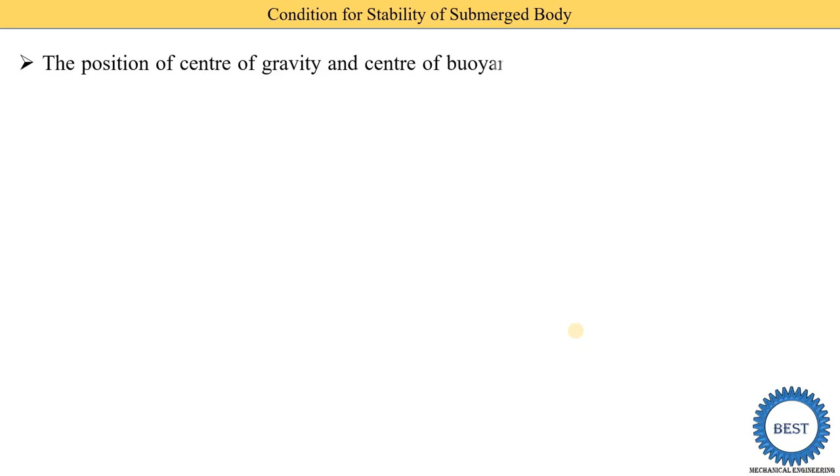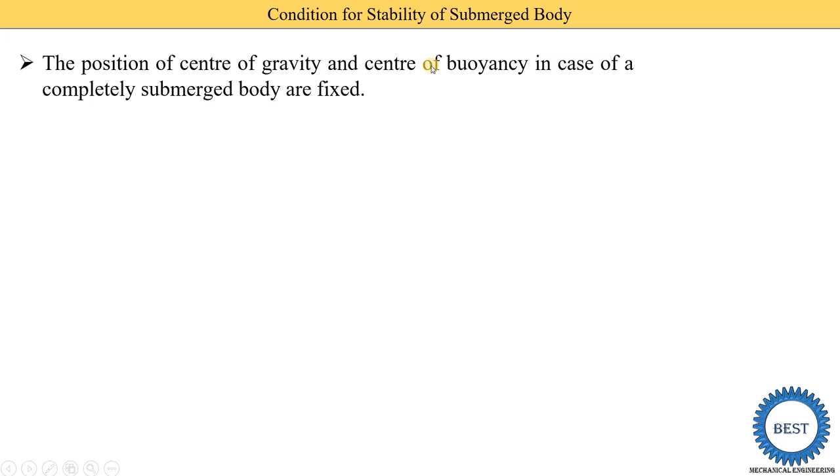For understanding these 3 points, we need to focus on two important points. One is the center of gravity and second is the center of buoyancy. When we study buoyancy, there are three important points. In the last theory of the metacentric height and the metacenter point, we studied 3 points. One is the G point, that is the center of gravity. Second, we studied the B point, the point at which the buoyancy force is applied, and third is the metacenter point. Metacenter means it is a point about which the body is oscillating. So when we study the submerged body, we need to focus on 2 points, center of gravity and center of buoyancy. We do not need to consider the metacentric point.

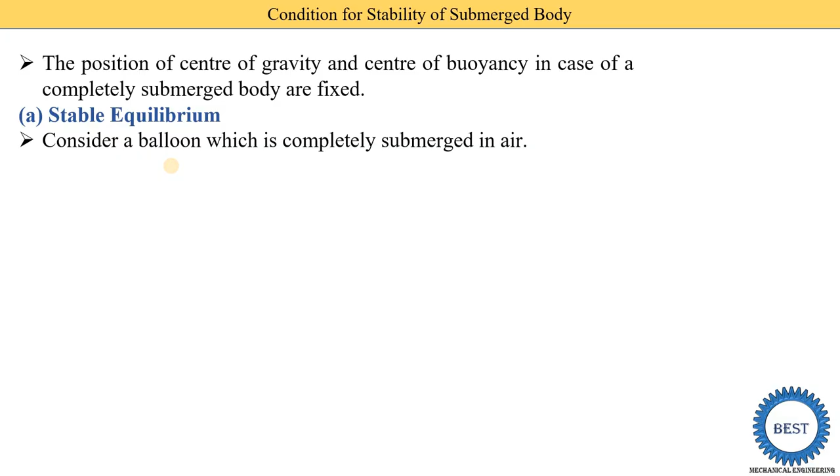So first we understand stable equilibrium. For understanding stable equilibrium, we consider a balloon which is completely submerged in air. Submerged means it is submerged in air, or submerged in a liquid or water. So here we see this balloon, and at the end of the balloon, for increasing weight or making it stable, we add some additional weights. In the balloon, this is the G point. G means center of gravity, the point where the whole weight of the balloon is concentrated. We know the weight always acts in the downward direction, so here we draw the downward arrow, and this W indicates the weight of the balloon.

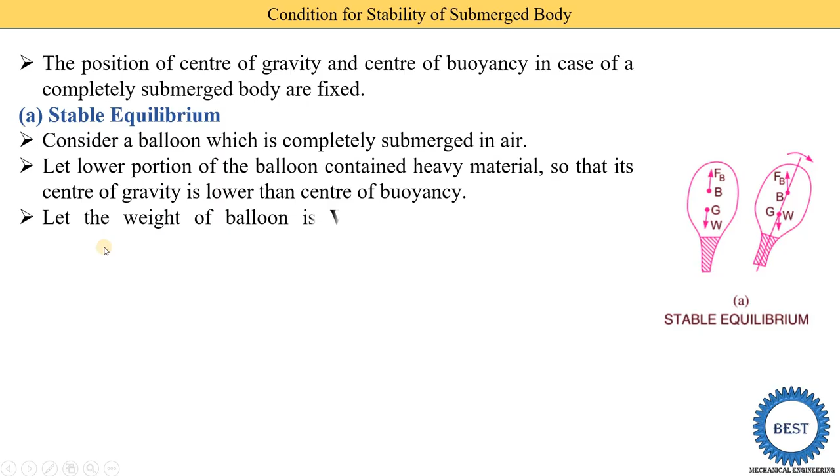And this is the B point, the point at which the buoyant force is concentrated, and it acts in the upward direction. The lower portion of the balloon contains heavy material, so its center of gravity is lower than the center of buoyancy. Due to that, the G point is below the point B. Let the weight of the balloon be W, acting through G vertically downward, while the buoyant force FB acts vertically up through point B. For the equilibrium condition, both the forces, the weight and the buoyant force FB, must be equal. So here W and FB are the same.

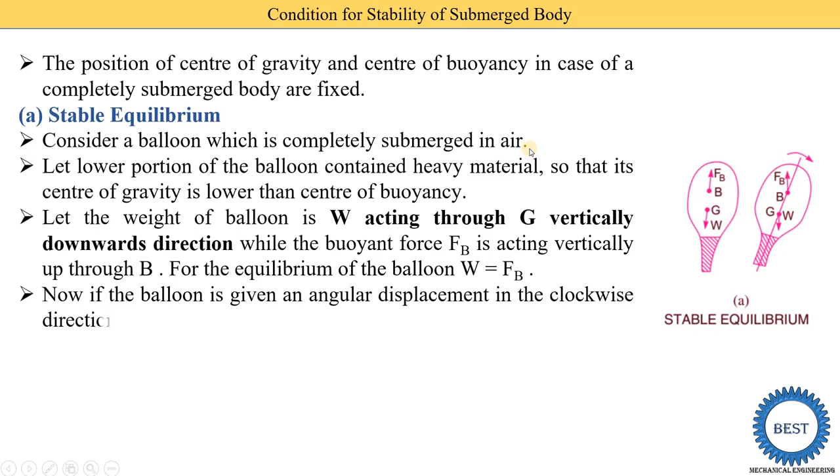Now the balloon is given an angular displacement in a clockwise direction, as shown in figure A. In this figure we see that a small angular displacement is given to the balloon in the clockwise direction. So at that time, what happens?

Then W and FB constitute a couple acting in the anti-clockwise direction and bringing the balloon to its original position. Thus the balloon in this position is in stable equilibrium. That means when we apply a small angular displacement in the clockwise direction, the balloon reaches a new position.

Here we see it is at a certain angle, and in this diagram both are acting on one axis, but here the axis is changed. So suppose we draw one vertical line, then a cross line, and then again this vertical line. So when we apply a certain force in this downward direction, what happens? The balloon is moving down in a clockwise direction.

But here some couple is created. So which couple is created? From here we see that W is acting in the downward direction. From this point to this point, FB is trying to move in the upward direction. So here one couple is acting, and this couple is trying to move in an anti-clockwise direction. So the balloon comes back to its original position, and it is called stable equilibrium.

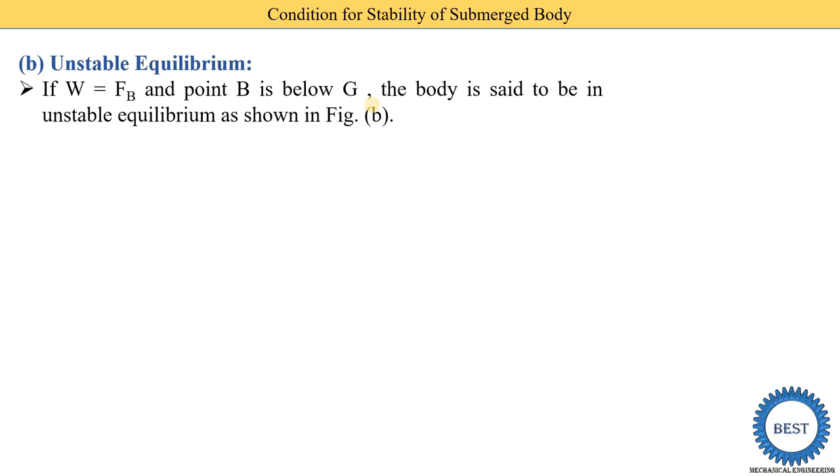If W and FB are equal, so W is equal to FB, here point B is below G. Earlier, B was above the G point. So in some cases it is possible that the centre of buoyancy is below the centre of gravity. Such a body, in which B is below G, is an unstable body. So the body is said to be in unstable equilibrium as shown in this figure.

So here we see this is the balloon, here certain weights are there, this is the G point and this is the buoyancy force. So in the diagram we see B is below the G point. W, the weight, is acting in the downward direction, and the buoyancy force FB is acting in the upward direction. So if a slight angular displacement is given to the balloon in a clockwise direction,

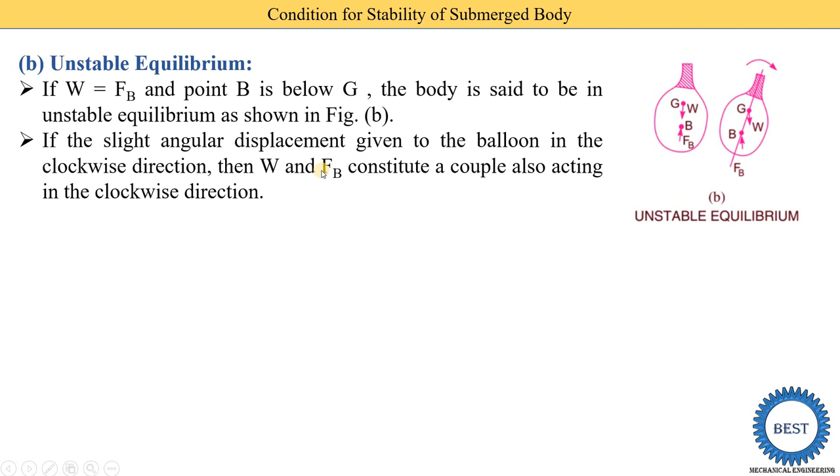we apply some angular displacement in the clockwise direction, then W and FB constitute a couple also acting in a clockwise direction. So how can we say it is also acting in the clockwise direction? Here we see this is upward, then this line, and from this line W is going in the downward direction.

So here the couple is created also in a clockwise direction. So here we give the angular momentum or angular displacement in the clockwise direction. The couple is also created in the clockwise direction. The body does not come back to its original position.

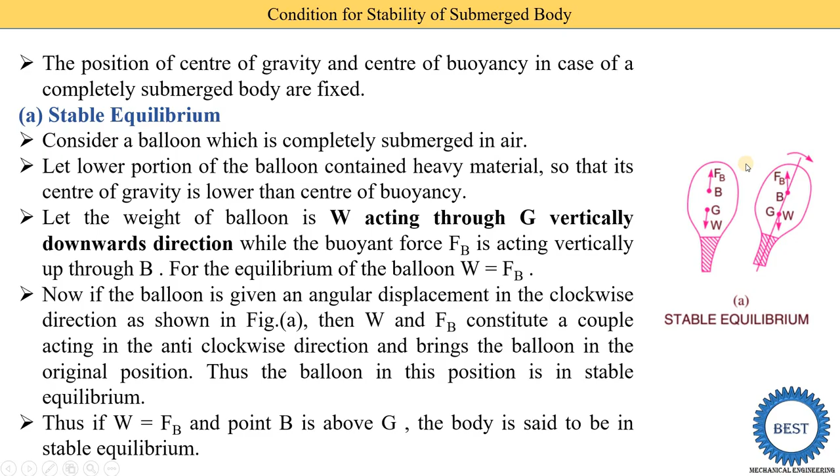Now earlier, in the stable body, we saw that the couple is acting in the anti-clockwise direction. So the couple is acting from here, these cross lines and this FB, so it comes in the anti-clockwise direction. But in the case of the unstable body, the couple is also acting in a clockwise direction, because here W is in the downward direction. Thus the balloon does not return to its original position and it is in an unstable equilibrium.

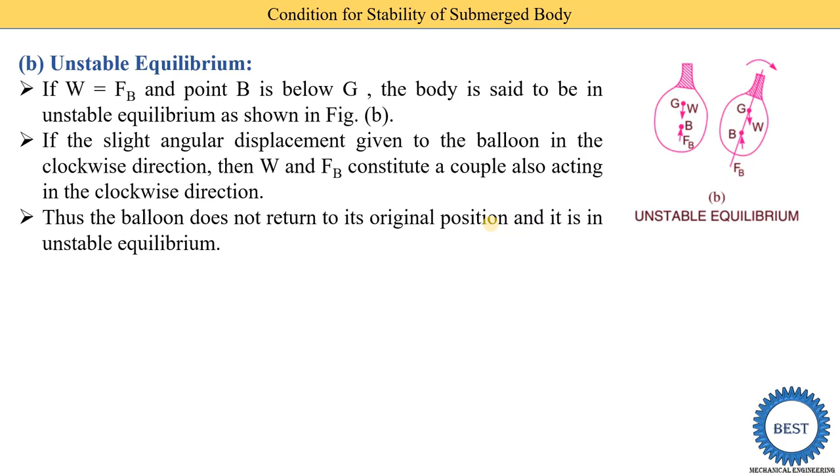Unstable equilibrium means when we give some angular displacement to the body and the body does not come to its original position, then it is called unstable equilibrium. And the third is neutral equilibrium. In the case of neutral equilibrium, first the weight and the buoyant force FB are equal. B and G are at the same point.

So in the earlier two cases, what we studied: in stable equilibrium, the buoyancy point B is above G. In unstable equilibrium, the buoyancy point B is below G. And in neutral equilibrium, B and G are at the same point. Okay, so B and G are at the same point as shown in the figure, then the body is said to be in neutral equilibrium.

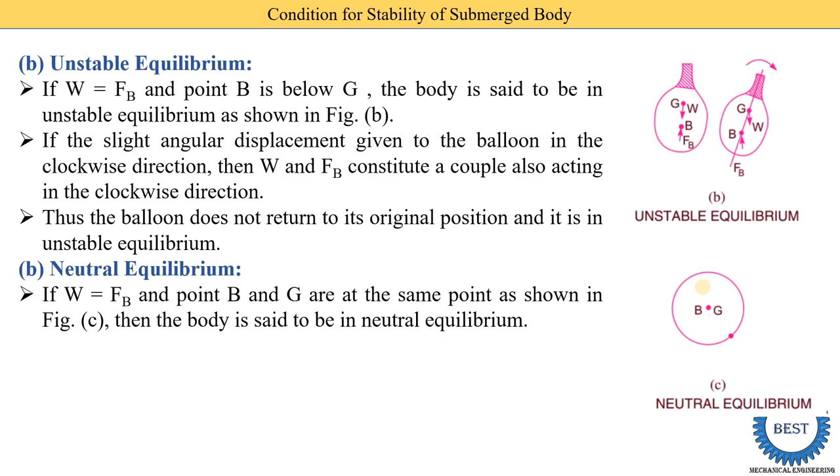Now here, more details are not given in certain books, but during neutral equilibrium, what happens? Neutral equilibrium is a state of equilibrium where the body remains in its new position after being displaced instead of returning to its original position or moving away. Means when we give a small angular displacement to the body which has B and G at the same place, the body is displaced and reaches a new position instead of coming back to its original position, then it is called neutral equilibrium.

Now here we summarize the difference between the three conditions. First, in stable equilibrium, the center of buoyancy B is above G. In unstable, the point B is below G. And in neutral equilibrium, both are at the same point. In all three cases, we give some angular displacement. So in stable equilibrium, when we give some angular displacement, an anti-clockwise couple is created, and due to the anti-clockwise couple, the body comes to its original position, so it is called stable equilibrium.

In unstable equilibrium, when we apply some angular displacement, the couple is also created in a clockwise direction. So here we provide angular displacement in the clockwise direction, and the couple is also created in a clockwise direction because here the G point is above the buoyant force. Okay, and the body does not come to its original position, so it is called unstable equilibrium. In neutral equilibrium, B and G are at the same point. When we give a small angular displacement, the body is displaced and gets a new position instead of coming to its original position, so it is called neutral equilibrium.

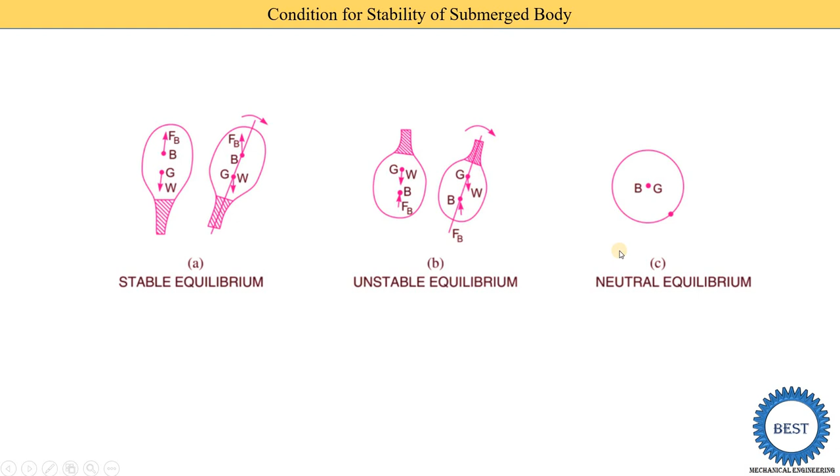So in stable equilibrium, the body comes to its original position. In unstable equilibrium, the body does not come to its original position, and in neutral equilibrium, the body is displaced and reaches a new position.